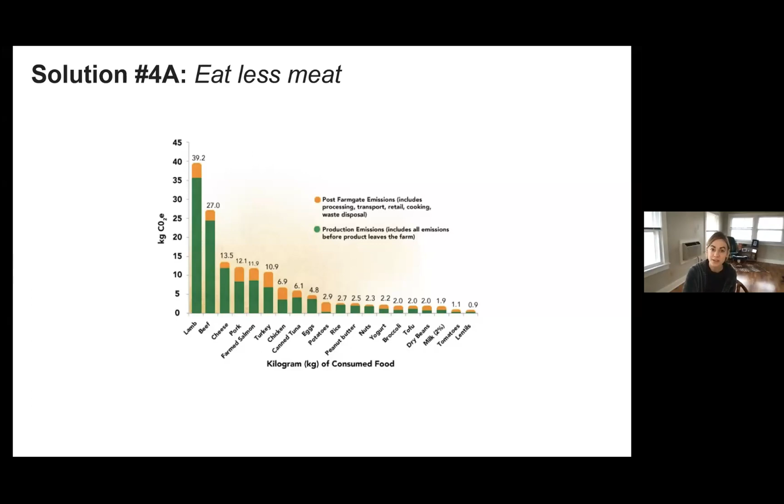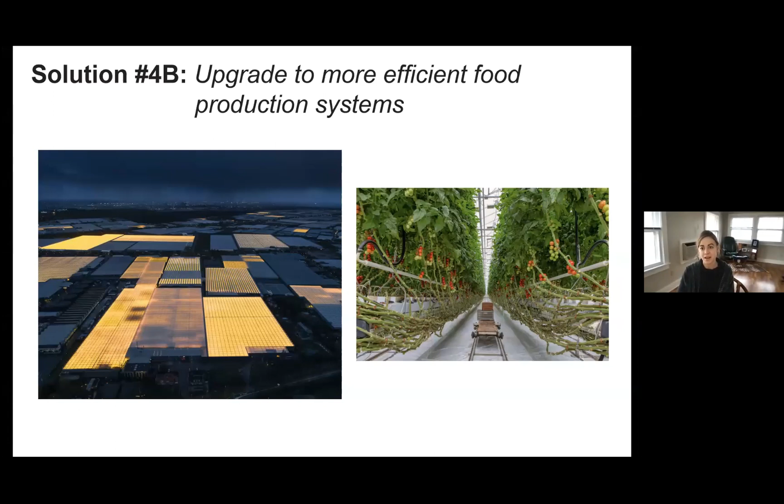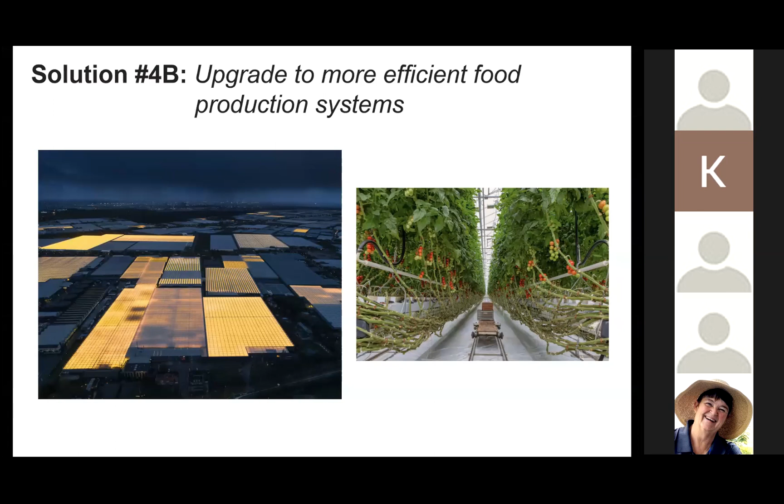The concept of greenhouse agriculture is explicitly mentioned by Sir David in the film, not only as a burgeoning agricultural sector—more profitable than field agriculture in many locations and scenarios—but also as a key to a sustainable future, because greenhouses are able to produce more crops using much fewer resources.

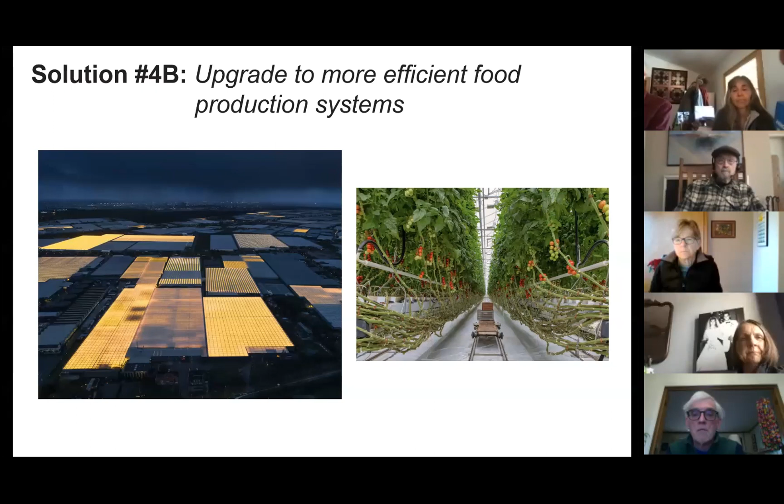If we're going to try to supply as many calories as are needed for 11.2 billion humans in 2100, we need to figure out a way to produce more food using less space. That's where greenhouse agriculture comes into the equation. There is an issue though: greenhouse crop production systems are extremely energy intensive.

Like I said, the whole point of controlled environment agriculture is, it's in the name, it's to control the environment inside of the structure in order to obtain optimal conditions for plant growth. And there are a lot of benefits to these types of growing systems.

However, in order to control this environment, just like we control the environments inside of our own homes, you have to run a lot of different climate control systems, heating systems, cooling systems, ventilation systems. You need to keep air circulating in the space. You need to trigger irrigation pumps. In many locations, such as the Netherlands, you can see that a lot of those greenhouse facilities, it's nighttime and they're lit up because they need to add in supplemental lighting in order to give the crops enough light to photosynthesize and achieve optimal growth conditions.

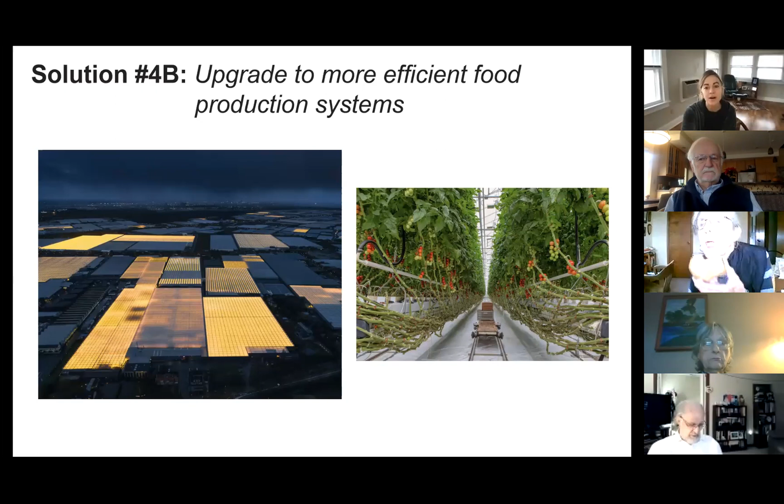So in fact, the top cost behind labor for greenhouse growers is energy. And a study that I like to point to often is this one. It was done in 2015, looking at lettuce production in Arizona, and Yuma, Arizona specifically. So Yuma is one of the top lettuce producers, lettuce exporters in the United States and in the world.

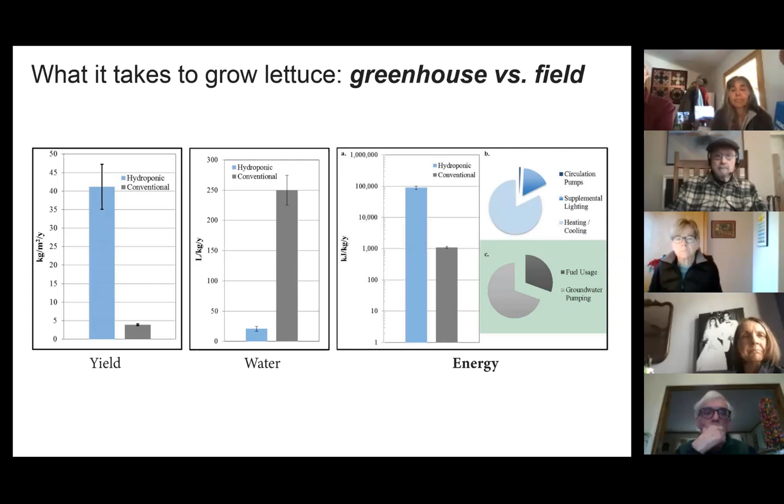This study done in 2015 was looking at what it takes to grow lettuce in a greenhouse hydroponic system. Hydroponic just means soil-less culture. You're not using soil to grow the plants. You're using oftentimes a liquid nutrient solution to fertilize and irrigate the plants. So what it takes to grow lettuce in a greenhouse hydroponic system versus a more conventional field agriculture system.

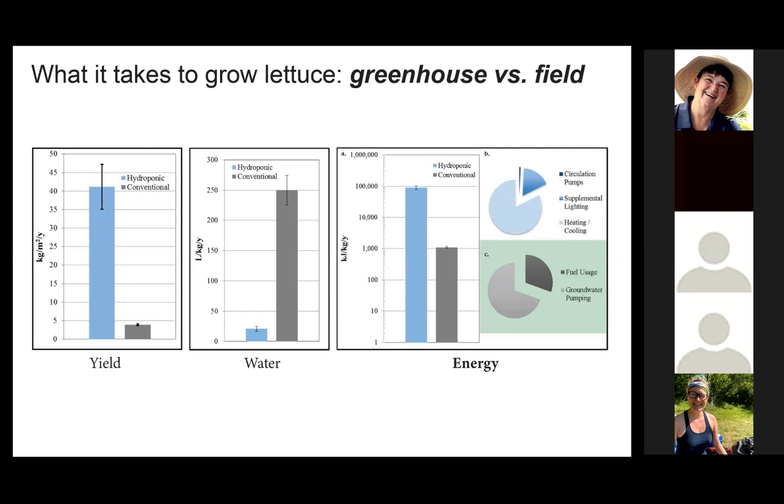If you look in the middle at the chart, you can see the water use by the greenhouse system was less than 10% of what was used in the field, in terms of liters used per kilogram annually. However, looking on the right, this is a log scale, so orders of magnitude, and it's looking at how much energy was required to produce a kilogram of lettuce in the greenhouse versus the field.

And the greenhouse was orders of magnitude higher than the field setting, because of running all of those electrical components and systems that we just discussed.

So this is a dilemma, right? We understand, based off of what David Attenborough has told us, our hero, as well as many other sources, that greenhouses are incredibly space use efficient, much more water use efficient and resource use efficient in general, as far as fertilizers and pesticides and all of those inputs needed for an agricultural system. But the energy demand is huge. So we need to figure...

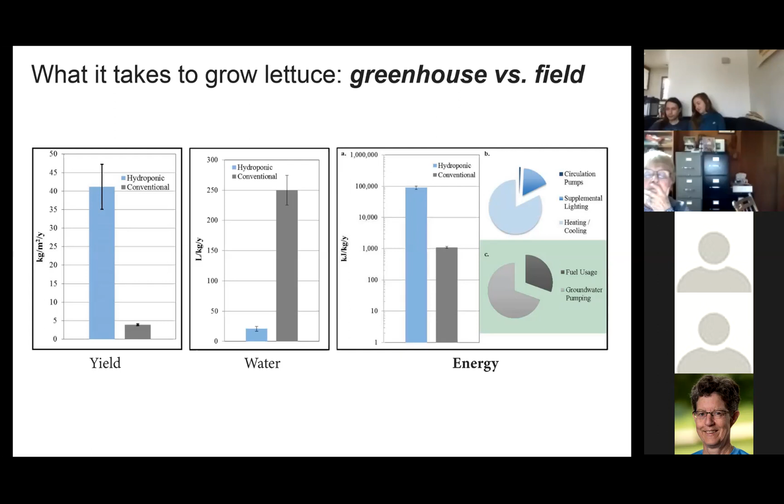...agrivoltaics comes into the equation. Agrivoltaics simply means the integration of agricultural systems like a greenhouse with photovoltaic energy, renewable energy. And there are many different system designs that can be used for agrivoltaics.

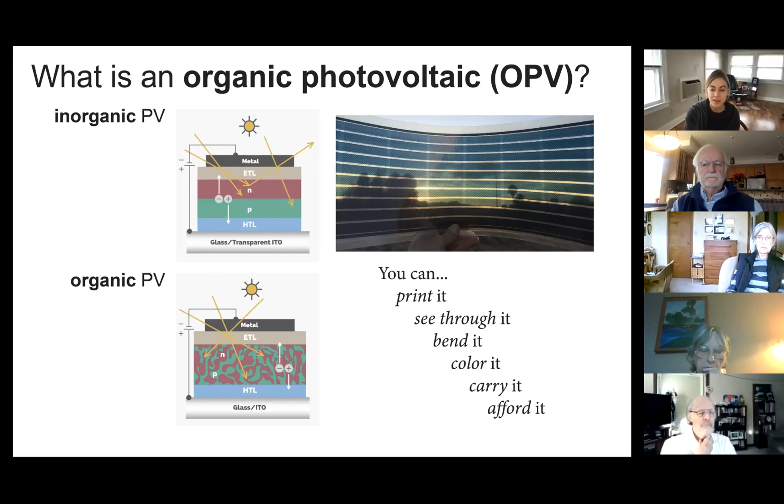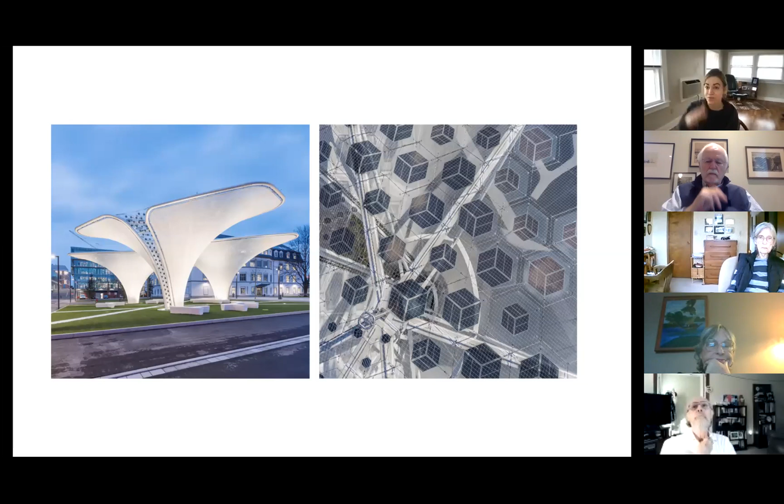People are interested in integrating organic photovoltaics onto vertical building facades, and that means that you are taking space in our built environment that is otherwise unused and converting it into a solar energy harvesting surface. So that's hugely advantageous in terms of space use.

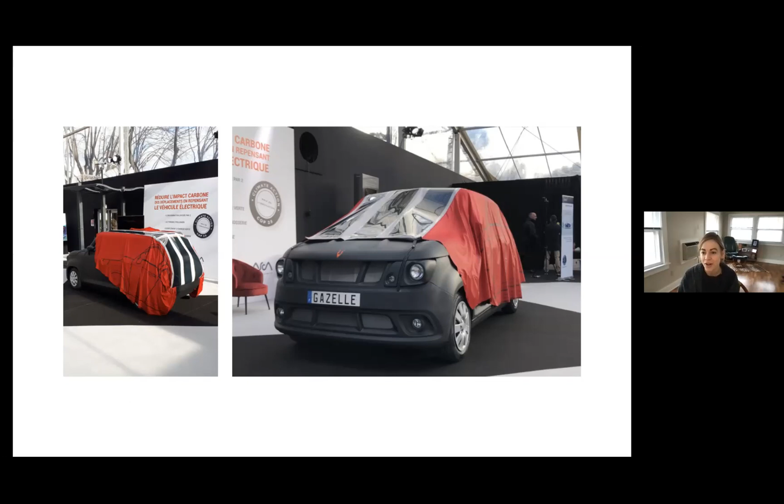But looking at greenhouses specifically, this is still very much in the research and development phase, and that's what my work is a part of. But people are interested in utilizing OPVs in the greenhouse environment.

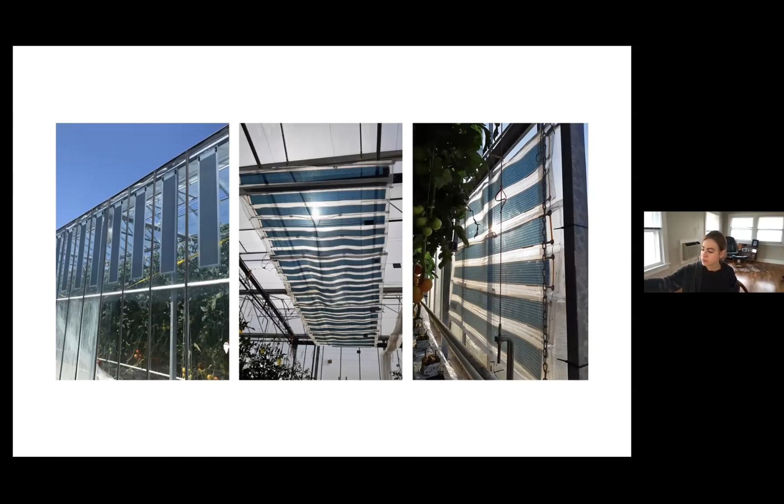So looking at research efforts that have been done for OPV integrated greenhouses in the past couple of years, I won't get into so much of the details with this study, but what's important to know is that it looked at the viability of an OPV integrated greenhouse in a variety of different locations around the United States, including Arizona, North Carolina, and Wisconsin.

This study was particularly interesting for me because it determined that a standalone commercial scale greenhouse located in Arizona, outfitted with an organic photovoltaic roof, would be able to be net zero, or produce its own energy demand, considering a lot of design assumptions about the organic photovoltaic material, how efficient it is, how much energy it can produce, what its spectral characteristics are.

In addition to the operation of the greenhouse, what kind of crop is being produced, how big is it, how often do you have to run the ventilation, cooling, heating systems, etc. But what they determined was that an OPV integrated greenhouse in Arizona would be able to meet its own energy demands based off of the electricity produced with an OPV system located on the roof, in addition to benefiting from the microclimate effects introduced by the shading caused by the OPV. And so for those two reasons, they determined that this system design concept would make a lot of sense in a place like Arizona for a greenhouse crop production system.

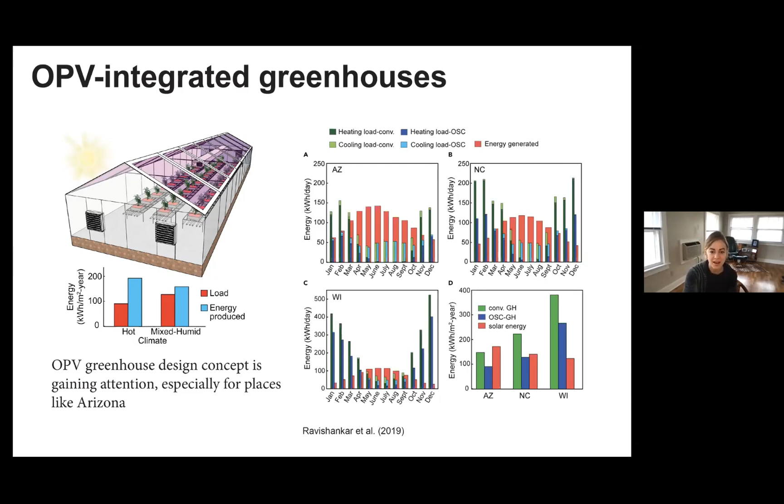So when thinking about these OPV greenhouse designs, there are a lot of design questions that we should be asking. And that is, first, how much power can an OPV system produce? That's one of the biggest considerations with this technology.

If you look at, again, a solar panel on Thad and Linda's house, that's 20% efficient. And by efficient, I'm just talking about how much power the solar panel is able to produce with a given amount of light. I'll be talking about the OPV devices that I used in my own research. We were looking at efficiencies between 1 and 3% for a commercially available large area manufactured OPV device. And that's a huge drop in efficiency.

But the exciting thing about OPVs is the trends that's been occurring in the past decade in terms of efficiency. So as I just said, Thad and Linda's panels are probably around 20% efficient. For an OPV produced today, commercially, you're looking at more like 8 to 10% efficient. And then for OPV cells that are on the cutting edge, manufactured in the lab, now you're starting to see 18% efficiency. So that trend is increasing steadily and rapidly.

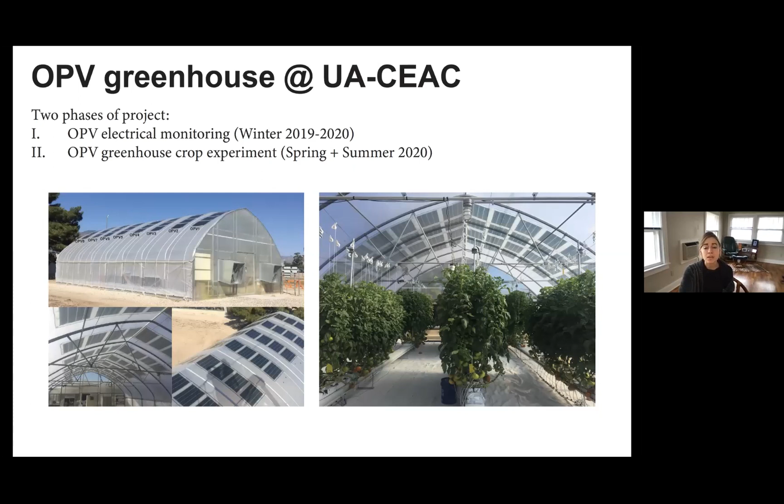And so the outcomes from this project: first, it was novel in that we were taking actually commercially available OPV devices, some of the first commercially available OPV devices, and characterizing the electrical performance of them deployed on an actual greenhouse structure. There's a lot of research interest and a lot of industry interest in OPV applications to greenhouses, but a lot of it has just been speculation up to this point.

So that's the true value here—we're taking a commercially available product and saying this is how it performed, and here's how it can actually be improved if you want to make this system design actually feasible from an engineering perspective and a crop production perspective.

And then in order to characterize the electrical performance of these OPV devices—remember they're curved as they're deployed on a greenhouse roof, on the one that we used at least—in order to say the OPV device is this efficient given this much sunlight incident on the device, we needed to be able to say how much sunlight at 10 a.m. on February 6th of 2020 was incident on the whole curved surface of the OPV device when we measured it, when we took an electrical measurement. So we needed to develop some novel methods in order to electrically characterize these curved PV devices.

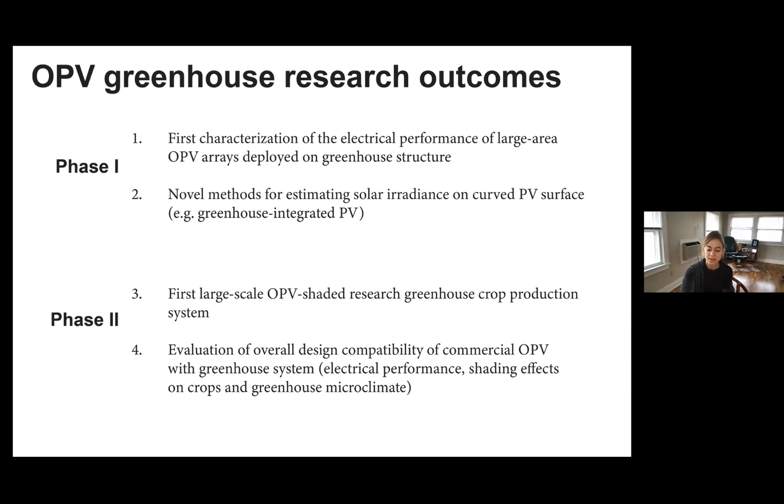So for our project, this is looking at the OPV devices that we used in a little bit more detail.

Each of these devices is about a meter squared in area, and an OPV roll that you see on the bottom is comprised of 8 individual OPV panels wired together in parallel, generating electricity from electrical leads located at the left side of the roll.

But each of these OPV panels is actually 4 OPV modules wired together in series. In the image on the upper left, each rectangle is an OPV module, equivalent to a conventional solar panel, also called a PV module. Each of these modules is connected together making one panel, and a panel is then wired together with 7 other panels to make an OPV roll.

What you see on the upper right are the nominal electrical characteristics given to us by the manufacturer of this OPV roll. As I said before, these are commercially available, some of the first commercially available large area OPV devices, and you're looking at a cell efficiency of 3.3%. Fairly low, but trends are improving.

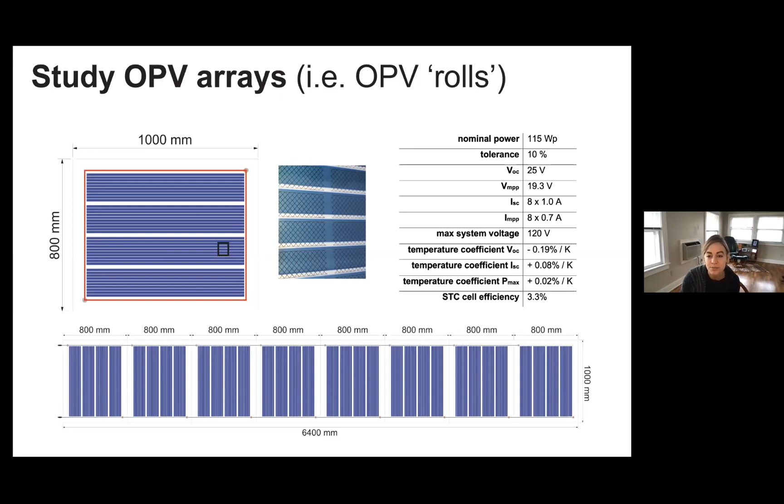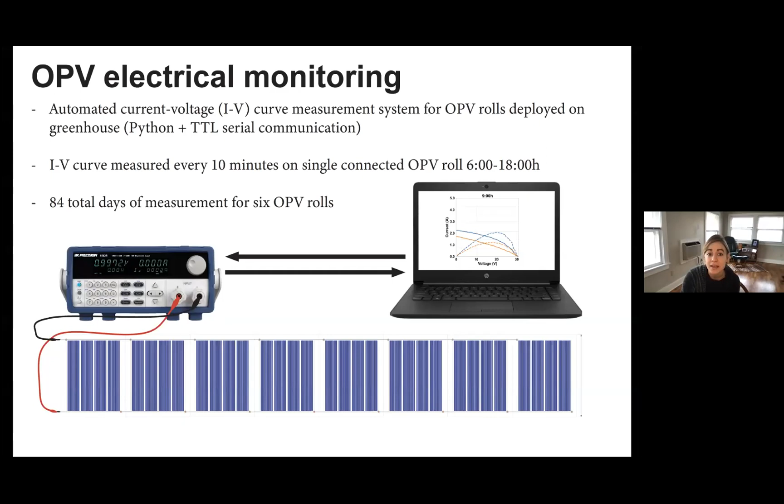So won't get into too much detail here, but essentially what we were doing is standalone energy monitoring of these OPV devices by sampling the current voltage curve from the OPV rolls. The current voltage, or IV, curve of a PV cell tells us basically how any electrical device performs in a circuit, and for a photovoltaic cell specifically, it can tell us interesting electrical parameters such as short circuit current, open circuit voltage, and how much power can be produced from the PV cell.

So we're interested in using this method of analysis for characterizing the electrical performance of our OPV devices. I was talking about PV cell efficiency, and it's important to know how much power can be produced by a PV cell given its area and the amount of sunlight incident on it. So the power conversion efficiency, or PCE, is calculated by looking at the power produced by your OPV roll divided by the incident sunlight times the area of the cell.

This is a fairly simple equation. We measured the power coming off of an OPV roll. We know its area, its surface area. What we don't know is how much sunlight is incident on the curved surface of the OPV roll at our times of measurement.

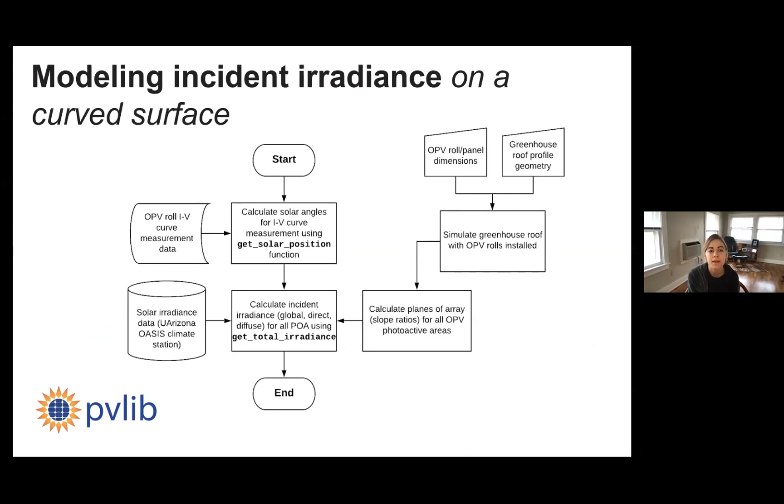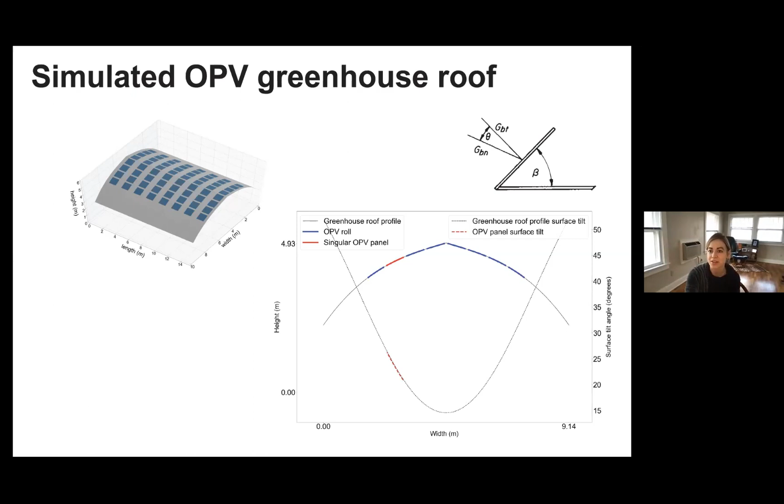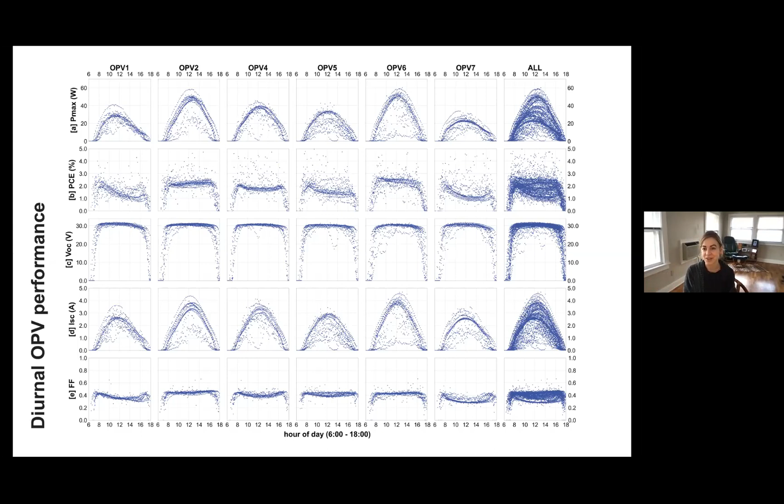A unique thing about OPV devices is that they degrade over the course of the day. The photoactive materials experience some kind of degradation effect, and so you're starting to produce less power given the same amount of sunlight, or a unit amount of sunlight, over the course of the day.

It was inconsistent whether or not they were more efficient in the morning versus midday, however. I'm highlighting OPV6 and OPV7 as two rolls, OPV6 our highest performing roll, and OPV7 our lowest performing roll. And I just want to highlight what I was talking about earlier, which is this electrical performance variability between identical OPV devices.

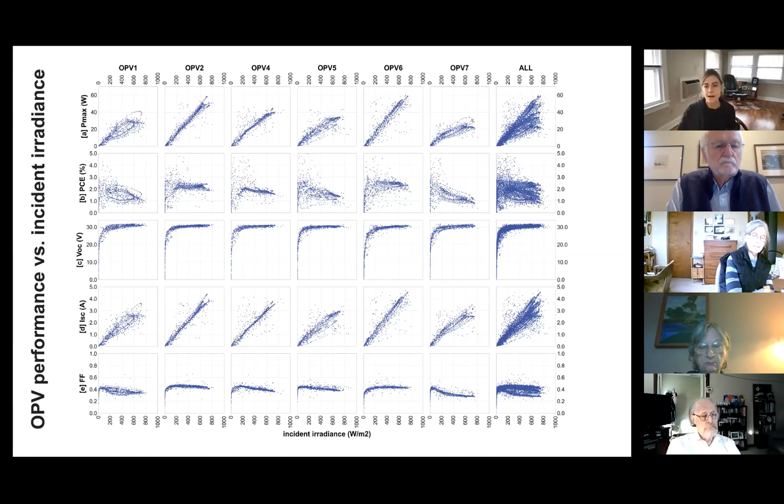So some key takeaways from this project were, first, that this design concept is gaining a lot of traction. It's gaining a lot of attention in both research and industry. But up until this point, it's a lot of speculation. It's a lot of these OPV material science nerds in the lab creating these incredibly efficient

OPV cells that are literally one inch squared, and then extrapolating that tiny cell performance to say, if we cover an entire greenhouse facility with these OPV devices, you could produce more than enough energy for the entire city or something like that. But the reality is we need to be testing devices that are commercially available and actually able

to be deployed onto structures, such as greenhouses or whatever structure you'd like to integrate it into. So what our study did, what phase 1 did, is providing methods for evaluating the electrical performance and deployment configurations of commercially available large area greenhouse integrated OPVs. We observed large variability in the electrical performance of identical devices, and again, that's getting at the need for consistent and reliable manufacturing processes of these exciting devices.

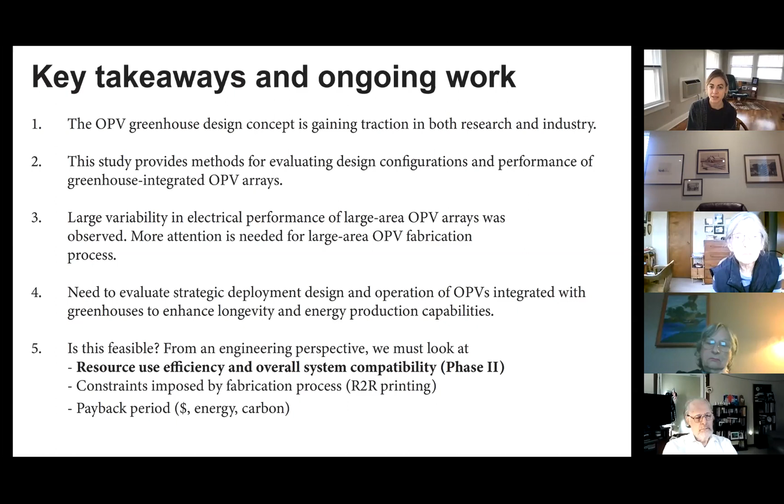So if you guys take anything away from this presentation, I know it was a lot of data, especially at the end there, but it's just the fact that photovoltaic integrated greenhouses mean food production and renewable energy generation year-round. And increasingly, it's obvious that those are two things that we'll need going into the future.